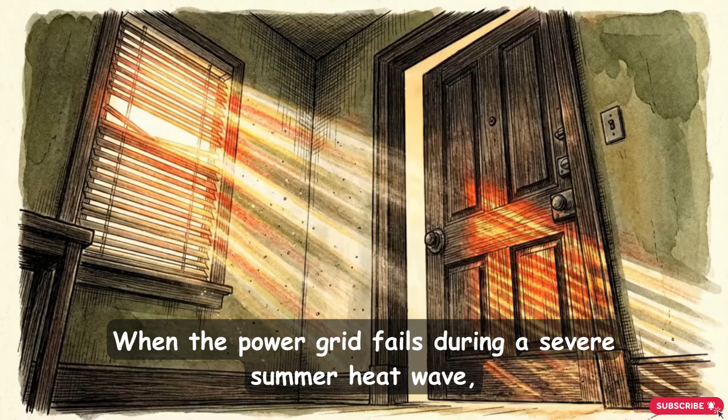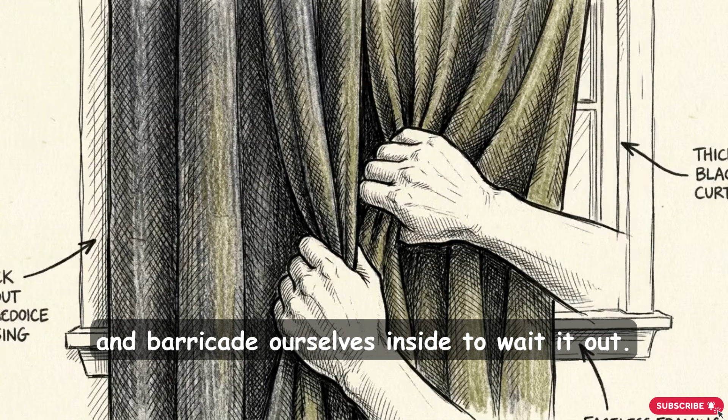When the power grid fails during a severe summer heat wave, the immediate instinct for most of us is to retreat. We lock the doors, draw the blinds, and barricade ourselves inside to wait it out. But there is a physical flaw in this plan. A healthy human adult at rest generates about 100 watts of thermal energy. In a heavily fortified, unventilated room, you are essentially a continuous space heater.

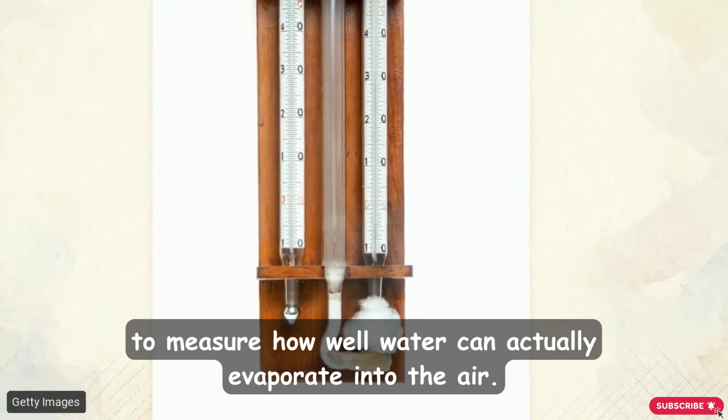To understand why that heat becomes deadly, we have to look at a metric called wet bulb temperature. This is an environmental reading that combines ambient heat with relative humidity to measure how well water can actually evaporate into the air. By sealing off your home, you eliminate the airflow required to remove heat and moisture. Without ventilation, your secure safe haven transitions into an inescapable physiological trap.

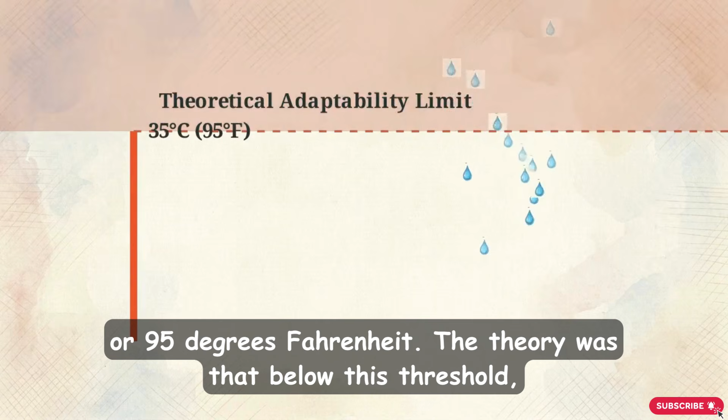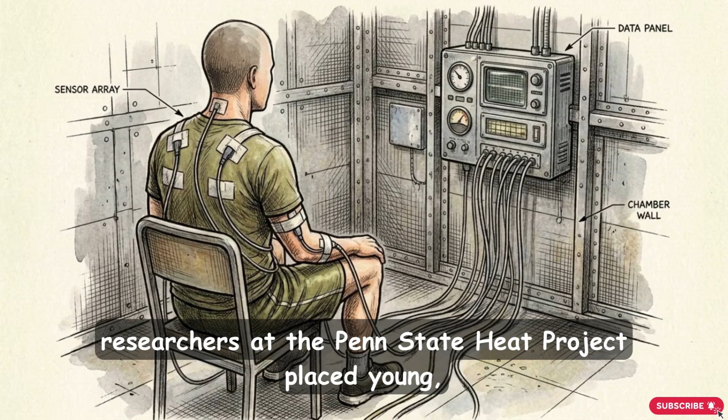For years, the accepted scientific standard has been that humans can survive a wet bulb temperature of 35 degrees Celsius, or 95 degrees Fahrenheit. The theory was that below this threshold, you could eventually sweat enough to keep your core from overheating. To test this exact survivability limit, researchers at the Penn State Heat Project placed young, healthy adults into controlled climate chambers to see exactly when the body loses its ability to regulate its own temperature.

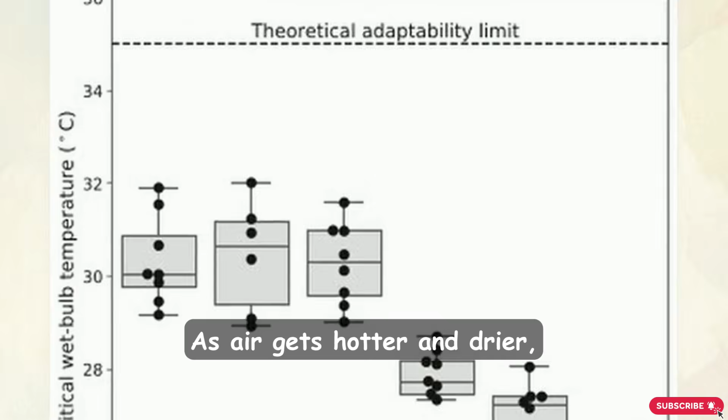This chart shows critical wet bulb temperatures. Instead of the 35-degree threshold, heat stress in humid environments hits healthy adults at just 30.5 degrees Celsius. As air gets hotter and drier, that failure threshold plummets further, dropping into the 25 to 28-degree range. In these conditions, dry heat from the room bakes into your skin faster than evaporative cooling can remove it.

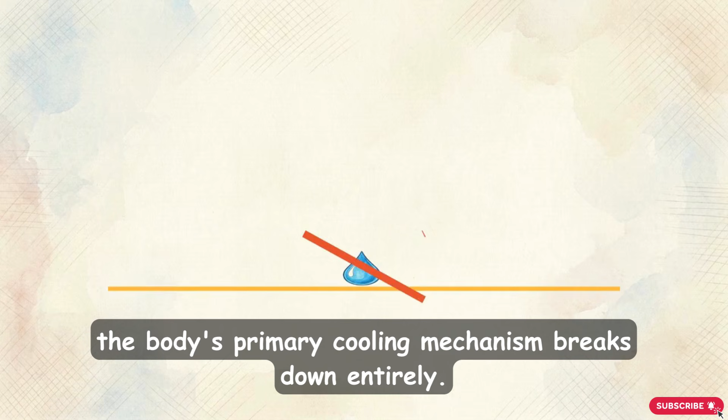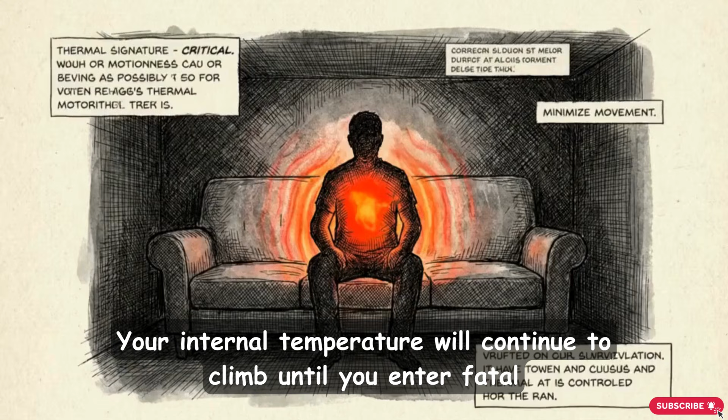When humidity prevents your sweat from evaporating into the saturated air, the body's primary cooling mechanism breaks down entirely. You stop shedding excess thermal energy and begin directly absorbing heat from your surroundings. Once that wet bulb limit is breached, drinking water cannot stop your core temperature from rising. Your internal temperature will continue to climb until you enter fatal heat stroke, even if you are sitting perfectly still in the dark.

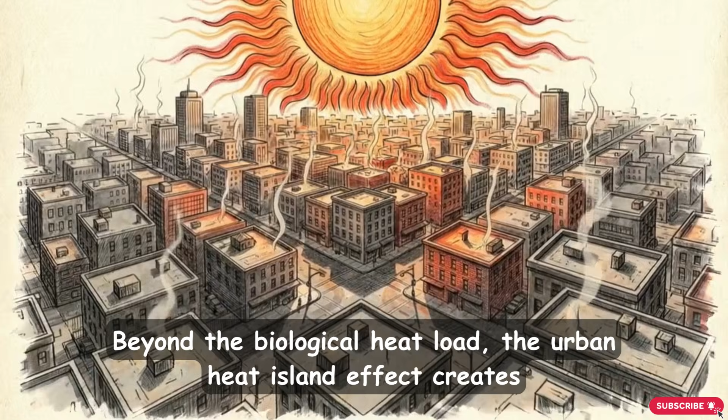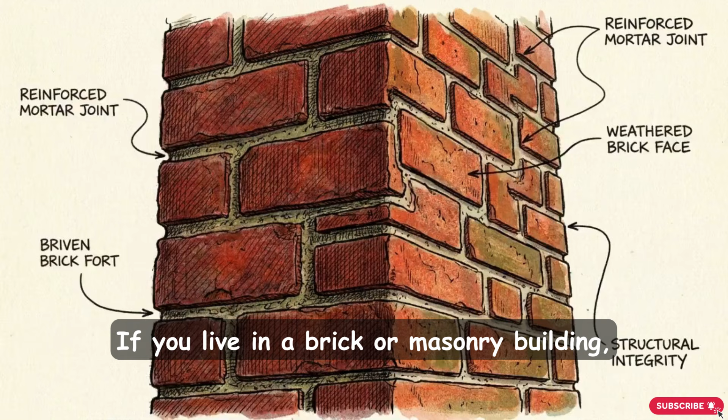Beyond the biological heat load, the urban heat island effect creates a massive environmental surcharge. Throughout the day, the dense concrete, asphalt, and steel of a city absorb solar radiation directly from the sun. If you live in a brick or masonry building, your home operates like a massive thermal battery. Instead of immediately blocking the outside temperatures, these heavy building materials spend the entire day soaking up that heat.

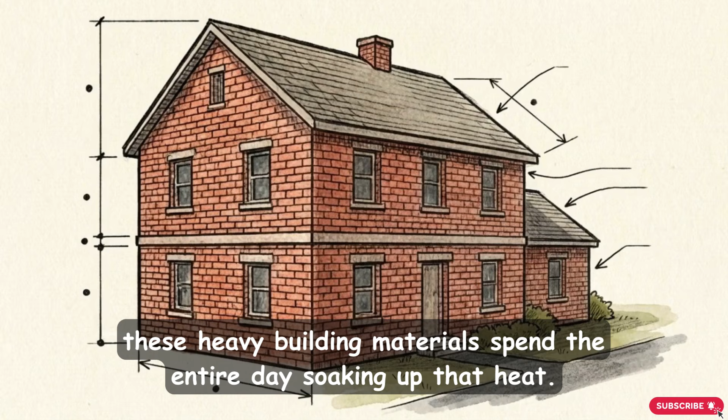Architects call this process decrement delay. It measures the specific time lag it takes for external thermal energy to travel through dense building materials and reach the interior space. When intense solar radiation strikes your brick walls at 1 o'clock in the afternoon, it doesn't heat your living room right away. The dense wall catches that energy, slowly pushing it inward over 9 to 12 hours. While dense masonry provides security, it also guarantees a thermal breakdown by storing heat that cannot be easily purged during a blackout.

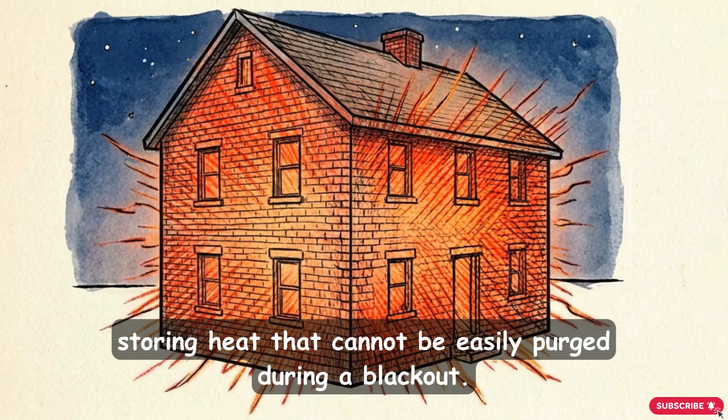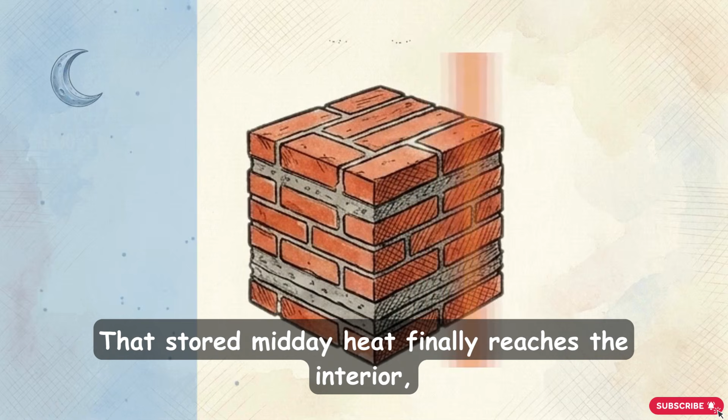Fast forward to 1 in the morning. The outside air has finally dropped to a cool temperature, but this is when decrement delay delivers its payload. That stored midday heat finally reaches the interior, radiating captured solar energy directly into your sealed rooms. Because hot air naturally rises, second-story bedrooms absorb the brunt of this effect. The trapped heat from the lower floors moves upward, compounding with the energy radiating out of the walls. Right when you are trying to sleep, your barricaded location becomes an active, radiating kiln. You are locked inside an oven of your own making.

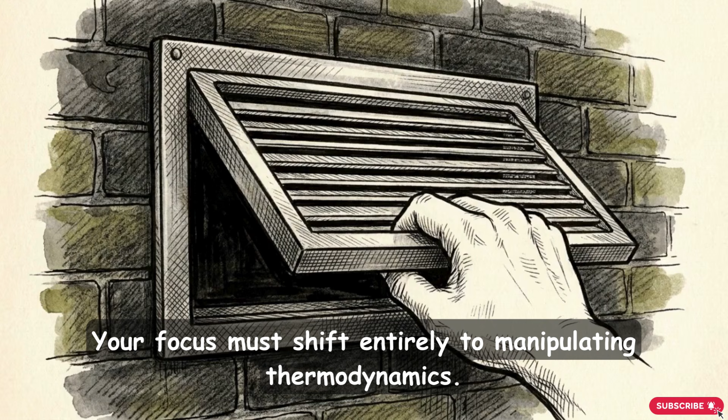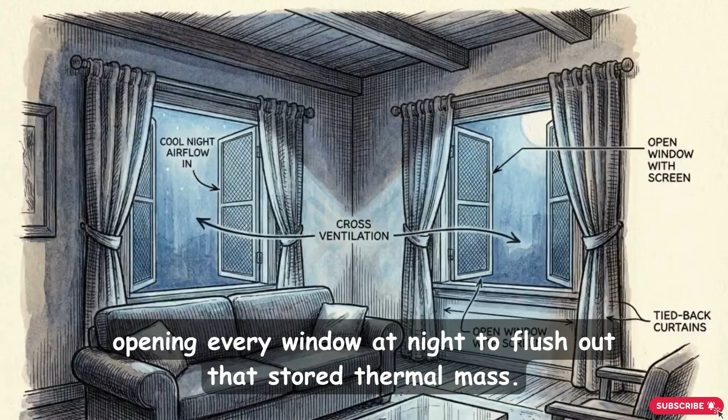To survive without electricity, you have to abandon those upper floors and stop relying on the thickness of your walls. Your focus must shift entirely to manipulating thermodynamics. The first tactic is nocturnal ventilation. This requires keeping your house completely closed and heavily shaded during the day to block direct sunlight, then aggressively opening every window at night to flush out that stored thermal mass.

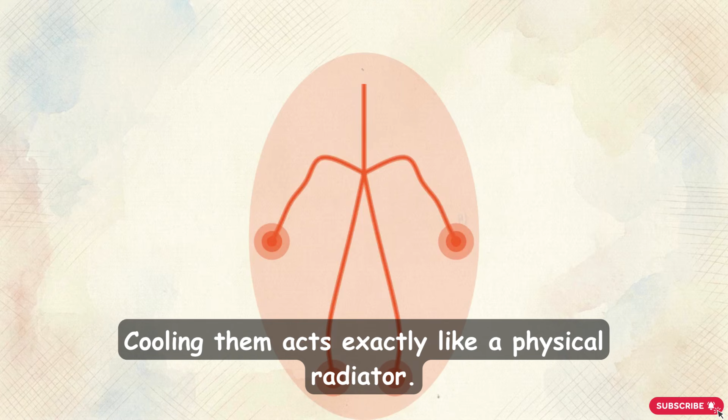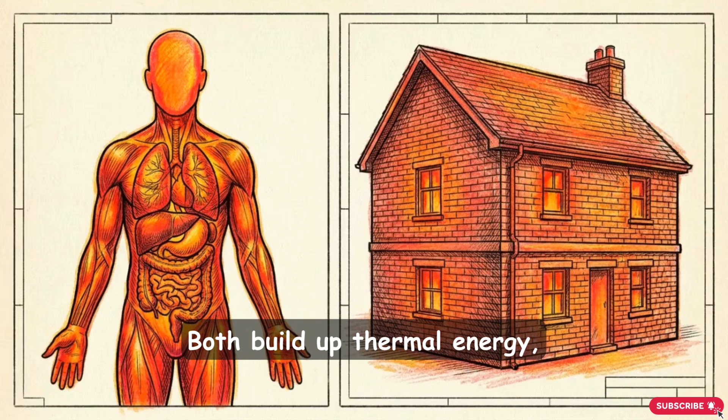If you start overheating, dumping water on your head isn't the most efficient physiological hack. Instead, apply cold water or wet bandanas directly to your wrists and ankles. These specific areas have superficial veins running very close to the surface of the skin. Cooling them acts exactly like a physical radiator. It instantly chills the blood, which then circulates through your system to lower your core temperature. Surviving extreme heat means treating both your body and your building as interconnected thermodynamic systems. Both build up thermal energy, and both must be manually flushed to prevent a total breakdown.

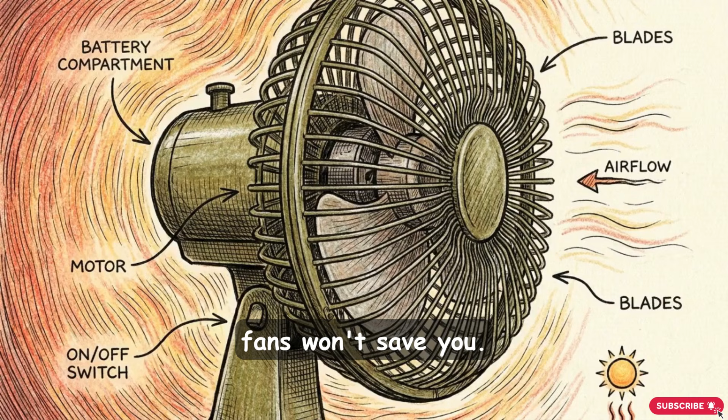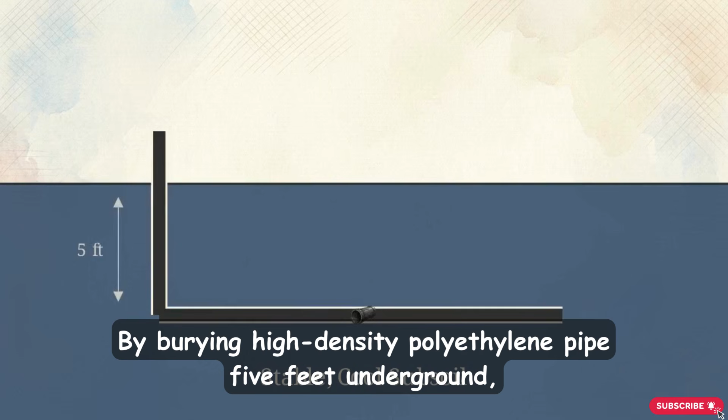If you live where the wet bulb limits are consistently breached, fans won't save you. You need to build a geothermal earth tube system, an off-grid air conditioner you can assemble for about $250. Just a few feet below the surface, the earth maintains a naturally stable, cool temperature. By burying high-density polyethylene pipe 5 feet underground, the system pulls blazing outside air through the cool earth, naturally dropping its temperature before blowing it into your shelter.

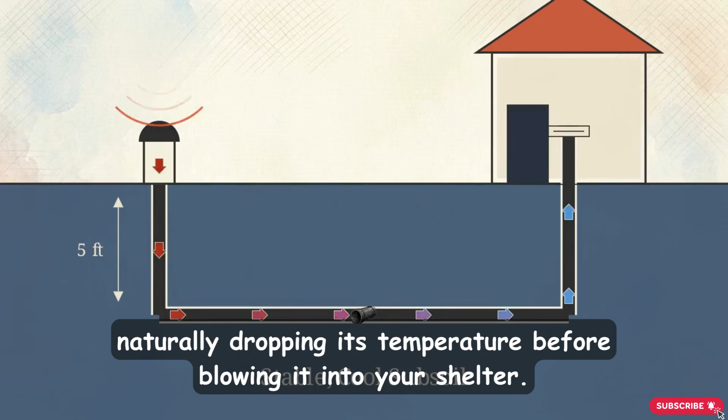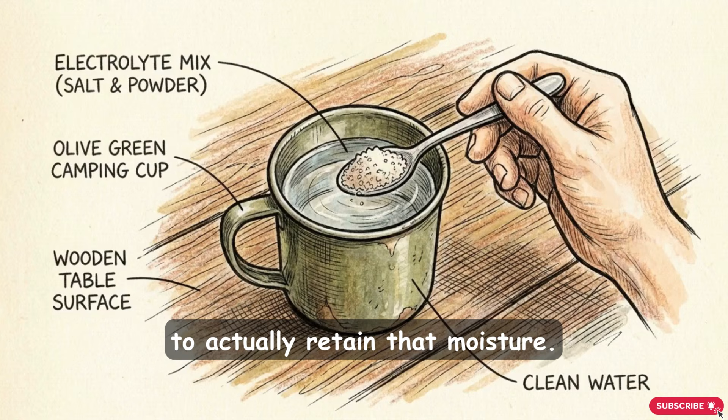While you stay cool, you must also maintain your internal chemistry. Sweating drains sodium. Drinking only plain water to replace it dilutes your blood, leading to a dangerous condition called water-induced hyponatremia. You must mix in a precise balance of salt and electrolytes to actually retain that moisture. When the grid fails, survival depends on mastering the thermodynamics of the urban kiln.